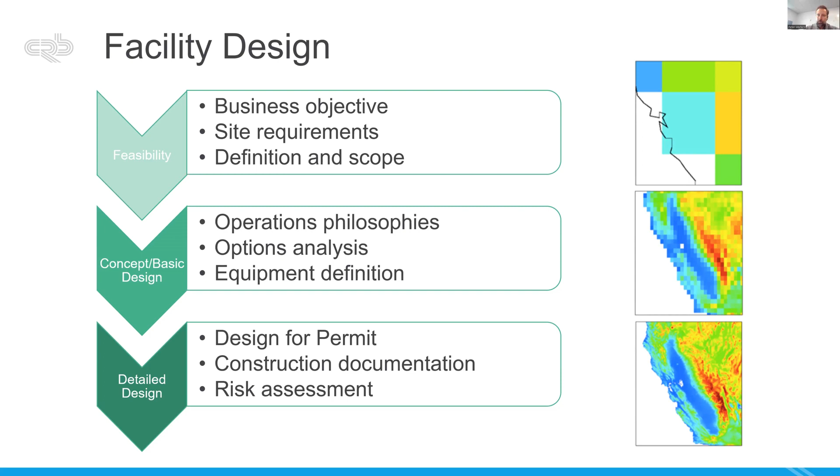Then you have the flip side of the process, which is construction. There's a lot of different ways you can go about construction, and I'll talk about that in a minute. But ultimately, you're taking those plans and you have a site and you are building the facility, or you're renovating a space, or you're retrofitting a core and shell. You're going through site walks as construction's going on to make sure that construction is happening per the plans. You want to make sure that you don't end up with the facility being built and then something was built wrong, or something was designed wrong and wasn't discovered until it was all fully built. You want to do field walks as much as possible to make sure that things are coming along.

Once the site is mechanically complete, as we call it, you still have to start it up. You still have to make sure that everything runs properly and as intended. So there's a phase where you are slowly turning on all the mechanical equipment, all the process equipment, all the utilities, and making sure they're getting into states that are operating as intended. You're doing engineering runs and engineering tests to make sure that things are to the quality levels that you want.

And then ultimately you're going into what we shorthand call CQV: commissioning, qualification, validation. That's the process of making sure that the equipment is doing what it's supposed to be doing, that it's the correct equipment per the design, and that ultimately your facility performs as it's intended to. And that'll be the basis for a lot of what we think of as a GMP space and a GMP facility, which is basically ensuring you have control over it and that you are performing it per your validated state.

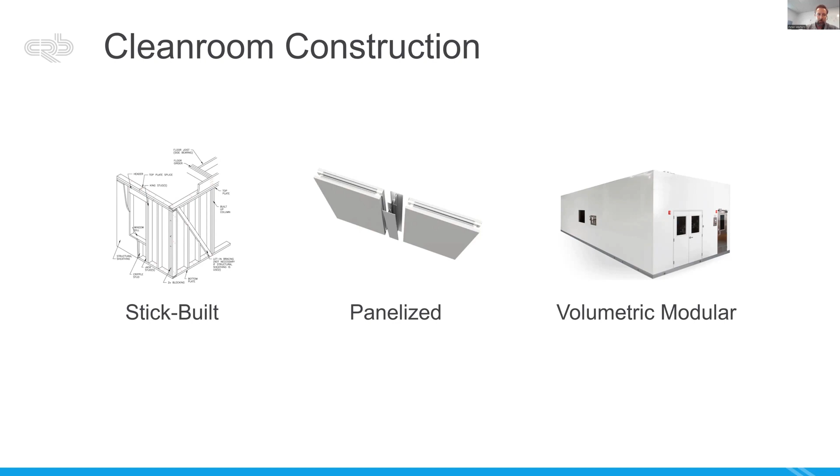So let's get into the actual clean room space and some design strategies here. I think the next couple sections are going to talk about space design strategy, and then even just like what is a clean room and how do we use them and what requirements there. I think certainly one of the things that's very tricky about cell therapy, GMP cell therapy specifically, is that there aren't any great standard models that you can use to design your space, because there's so many nuances to cell therapy in terms of what technologies you're using and what steps you're performing and how long those steps are. If you're shipping fresh or frozen, there's a lot of different considerations which resolve themselves into a whole smattering of

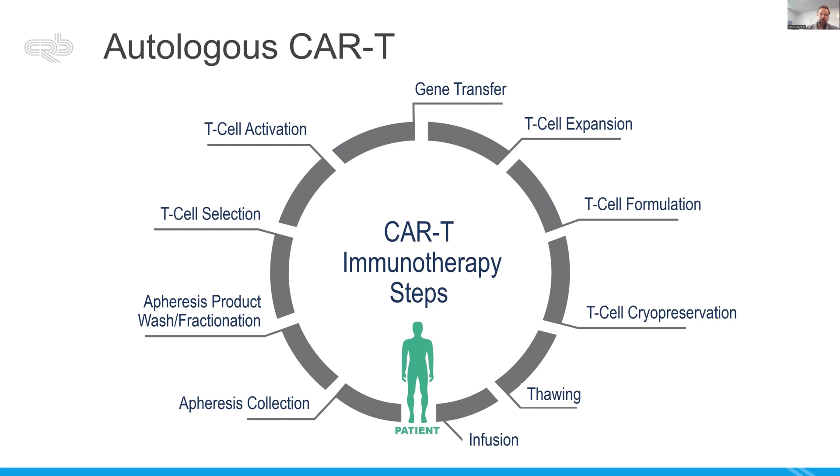So we're going to get into a couple different strategies here. There's a number of ways that you can go about it, but these are the three basic strategies that we talked about in the chapter. So in terms of room and space design, one strategy certainly is dedicated production space. This would be where you have a room where you are doing a process, whether the entire process or a portion of it, by itself. In this case, it would be patient dedicated, product dedicated.

This, of course, gives you maximum chance of managing cross-contamination or risk with any other steps that are going on, but they're also typically inefficient because everything in that room, including the square footage of it, gets tied up for that one patient. So these tend to be good for short duration processes. If you have a process where the whole thing can take place in a couple of days, this could be a great way to manage that process and de-risk it. It's good for open processes where you can right size the super highly classified environments. It's also good for processes with very high risk steps or very high risk materials.

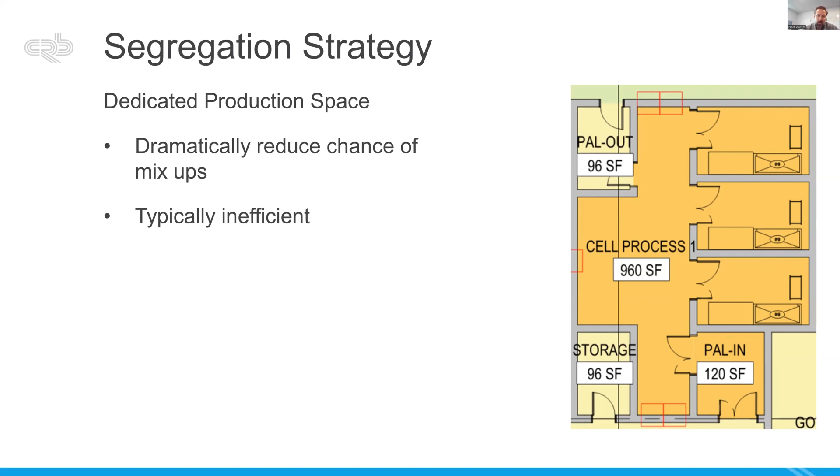On the flip side of that is the idea of what we call a ballroom. So a ballroom is going to be a much more open, flexible space where you're handling lots of different patients at the same time, maybe even different products, depending. It tends to be not only flexible because you can rearrange things in the room as necessary, but it can be a very efficient space usage because you're minimizing the number of airlocks and circulation corridors per patient.

Because you have all these patients in the same space, it works much better with closed processes. By a closed process, I mean a process that is fully contained within its equipment, where the process stream doesn't interact with the surrounding environment at all. And so, if you've got a closed system, then you're de-risking at the equipment level. And so that can enable you to use a ballroom setting, which again is going to be a lot higher efficiency, a lot more flexible in terms of accommodating different technologies in the future, or maybe even more patients per year in the future.

You can also use dedicated rooms, like I just showed in the previous slide, in conjunction with ballrooms, so that if you have one step that has to be performed open or one step that's very high risk, you can take your cells out of a ballroom setting into a dedicated space to do that one step or a small handful of steps, and then bring it back to the ballroom. And that's a way that you can manage the risk for high risk steps while also allowing for a much more efficient, flexible space.

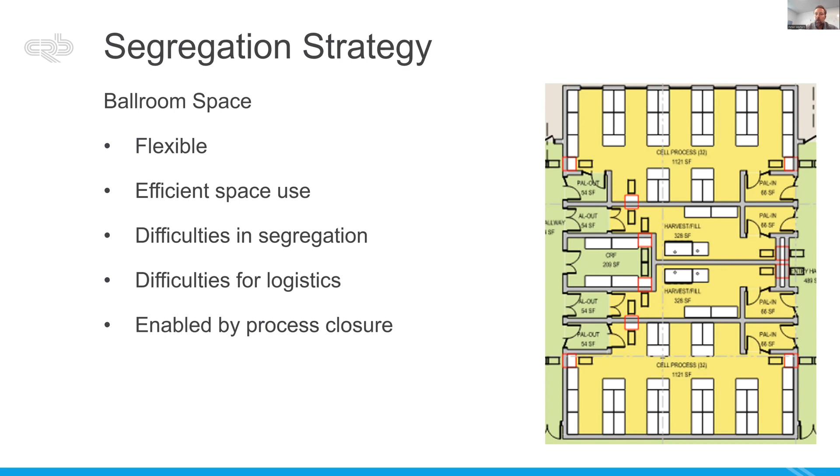We also introduce a strategy in the chapter that we sort of called a dance floor. And the idea here is using a combination of different rooms that are sort of right-sized to unit operations, as opposed to performing something in one space, maybe bringing it to another for certain things and then coming back and having workstation type approaches. The idea of a dance floor is to basically have spaces that are dedicated to certain unit operations, and you're moving your process across rooms through those unit operations.

I think what's powerful about this approach is that you can right size each of those rooms and number of equipment to accommodate utilization needs for that step. So if you spend a lot of time in an incubator, for example, you can have a space that's a little bit less classified with a lot of incubators. And if you're spending a lot less time in a separation system, for example, you could have fewer separation systems in the right classification to support that.

And so this allows you to really drive up utilization in your equipment, which ultimately is a much more efficient space design. However, in this type of strategy, you are moving your process through the building somewhat significantly. And so you're going to have maybe more movement logistics in the hands of operators to move those things around. You're going to want to make sure you've got practices and procedures in place to not only navigate the transitions between clean rooms, but also in terms of chain of custody and chain of identity, that you're not mixing up different cells as you move through that.

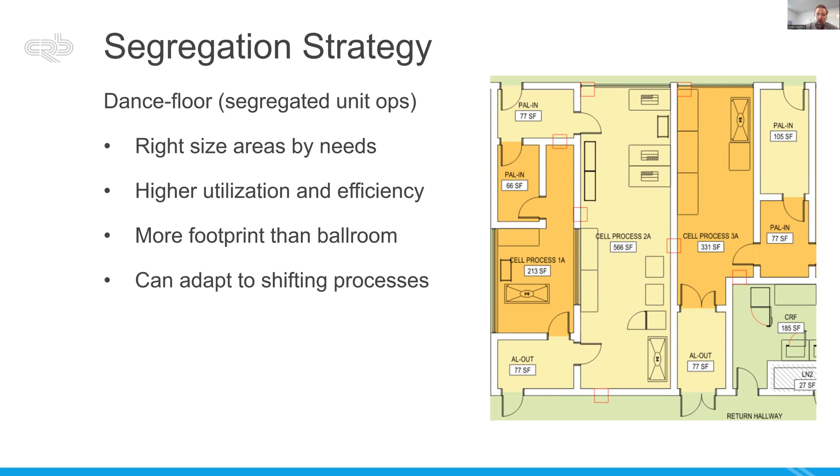Looking at these can help identify traffic patterns through your facility, making sure that you don't end up with bottlenecks at things like airlocks, but also make sure that if you have a lot of movement through certain corridor areas, you're aware of that and you can put things in place like temporal segregation, or maybe you make the corridor a little bit wider, or you've got staging spaces to help accommodate those movements. Because again, if you have a lot of motion, that introduces the opportunity for mix-ups or contaminations.

And I'm showing the GMP cleanroom cores here, but you should look at things like material and personnel movements across the whole life cycle of that process. So where it comes in at shipping, receiving, through the warehouse, through the facility corridors, into your clean rooms, and then back out, to make sure that, especially for autologous cell therapies, things are moving through your facility in a very facilitated way, so that you don't end up mixing up incoming and outgoing materials, for example.

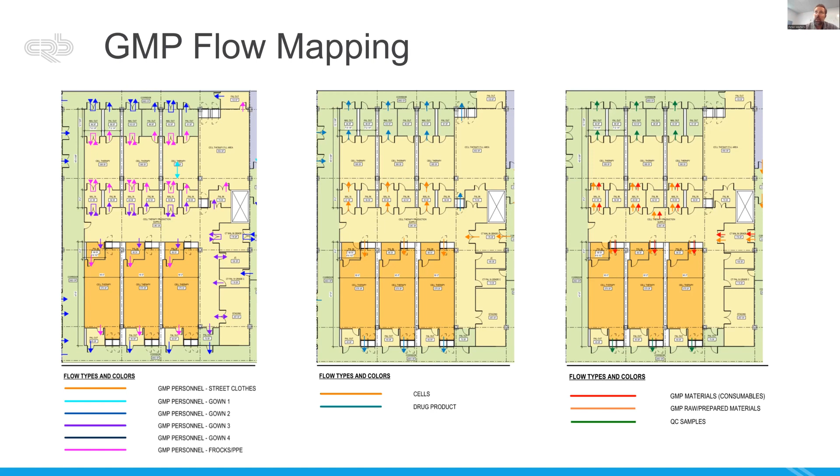When we're talking about clinical one spaces, I think the idea of using a glorified lab works pretty well, but I hate when people refer to GMP facilities as just a lab, because, again, the building and the space design want to facilitate all the movement. So I have a quick baseline case study here to show two examples of how, using the same square footage, you can dramatically change how the operators interact with the process in the space.

So in this example, you've got what is thought of as a unidirectional flow suite. We have a ballroom with various biosafety cabinets. You've got shared equipment, which could be in-process testing, cell counters. You've got maybe incubators or freezers or refrigerators put at the two ends. And so at a room level, you've got people coming in one side, going out the other. But within the room, you get this spaghetti diagram of back and forth movement between the workstations and the shared equipment, and people are overlapping, and it's definitely not unidirectional flow within the space.

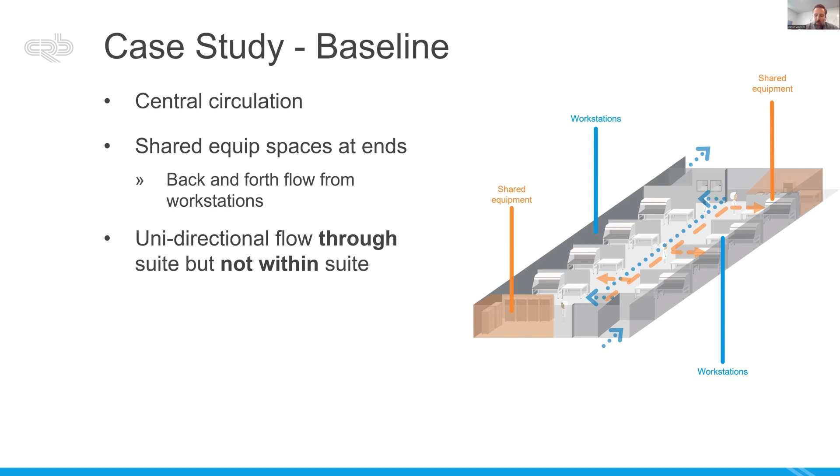Definitely some opportunities for people sort of across mixing up materials. Whereas if you take all that shared equipment and you lay it out longwise throughout the center, and you shrink the footprint top to bottom, so now actually the square footage is identical between this last model and this model. However, you can see not only do you have unidirectional flow through the room in terms of people coming in one side and leaving the other, but you've now separated that central aisle into two, and now you get people bouncing back and forth from their workstation to that center place and out.

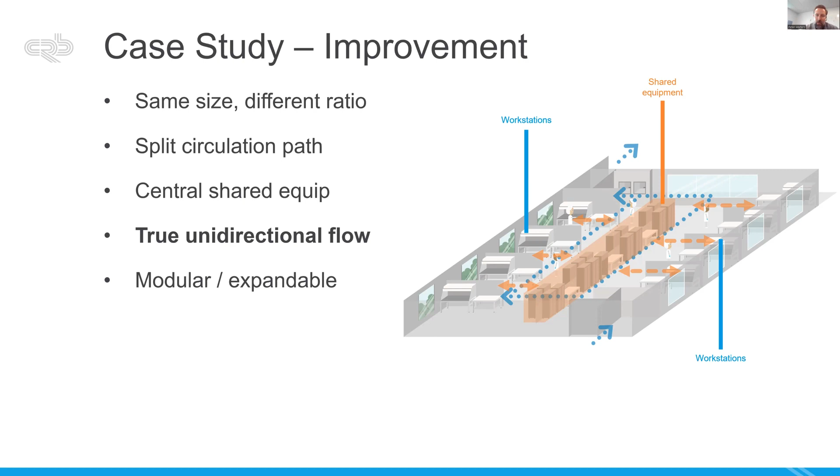So it's a much more facilitated unidirectional flow, much better segregation within the suite, much more identifiable workstations and process flow. It's kind of like an artistry to how you do these. Ultimately, you want to get to a general arrangement diagram that's very specific in terms of how you lay out your equipment and your room flow.

Certainly, you want to be mindful of how many people are going to be working in this space, what utilities are needed, and, especially when we talk about autologous cell therapy, trying to make these as efficient square footage wise as possible, because usually the idea around autologous cell therapy design is you design for X number of patients through this workstation approach, and then you scale these out.

And so any inefficiency in utilization of equipment, additional redundancies that maybe aren't needed, certainly any dead square footage in this space is going to duplicate every single time you repeat this out. And so getting it right the first time is definitely critical as early as you can.

At the same time, you want to be mindful of designing for a way to manage change, understanding that a lot of these processes, especially in early clinicals, aren't quite nailed down in terms of the technologies they're planning to use. And so being mindful of giving at least a little bit of space to accommodate different platforms that might come in, or different technology changes as you go through that maturity life cycle of clinical and realization into a commercial setting.

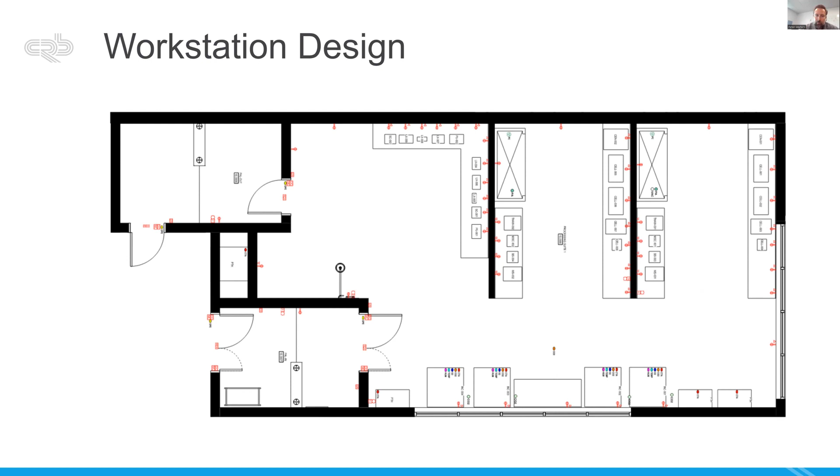And again, ultimately you want to have a facility design that is trying to prevent any chances of mix-ups and cross-contamination. There's a couple different design guides out there. We tried to capture a couple things in the chapter 11 itself, but as an example, NIH has a great guide for biosafety cabinet placement, some rules to help make sure that you're not getting crosstalk between various biosafety cabinets, that you're not putting things so close together that you're impinging on their processes.

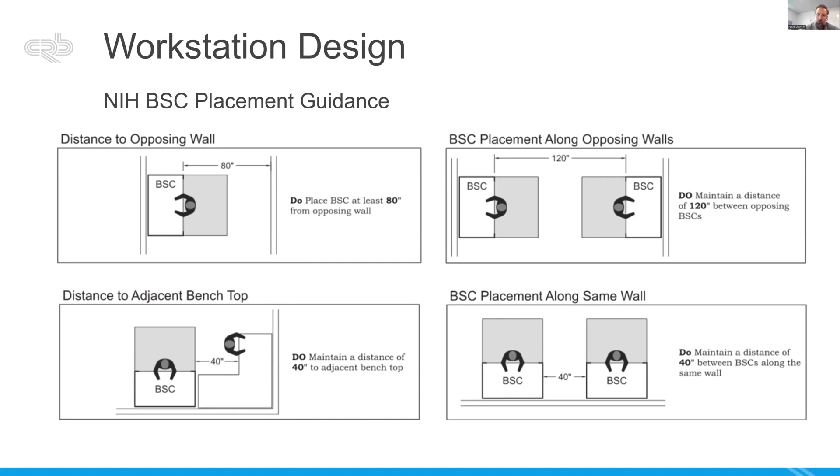And so we always try to incorporate these as we lay out the equipment, the support equipment, the testing equipment, but also the primary manufacturing equipment with any biosafety cabinets that they need to be interacting with. Another facility consideration, the EMA released the latest update of Annex 1, which certainly as far as the facility goes, has some implications for how you would design cell therapy facilities.

And there is a strong push now towards the ability to permit observation into production areas where you're doing aseptic operations. So really thinking about that glazing in the glass, not just for opening up daylighting and showcasing for the operators or showing off your processes, but also from a regulatory standpoint, they really want the ability to see into the space and get eyes on it without having to do full bunny suit gowning and getting into it, which is not really where you want observers or anyone from the agency to be anyway.

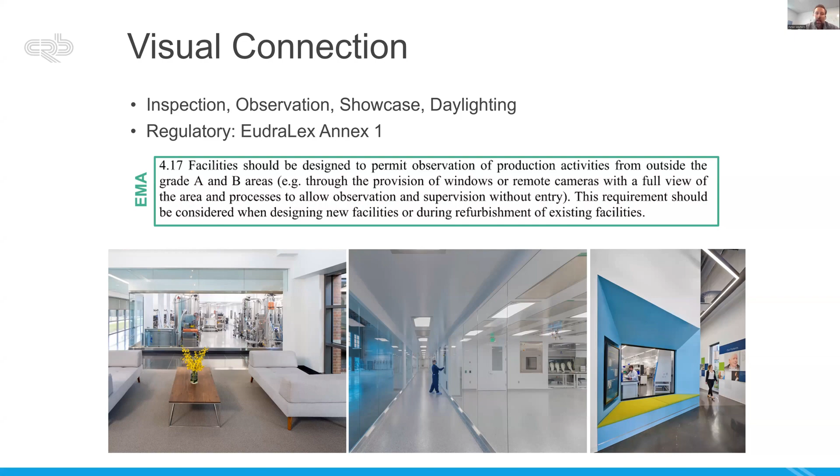And then the last thing about sites, when we talk about the facility on the whole, how you arrange all the spaces, especially for autologous cell therapy, is pretty critical. You want to make sure there's good handoffs between your shipping and receiving and how that gets to the warehouse, or how your apheresis gets to its inspection area, how that gets to the manufacturing, how the QC samples get handed off. And so how you arrange all the components of the whole space should be methodically thought through, really thinking about chain of custody and chain of identity throughout the course of it.

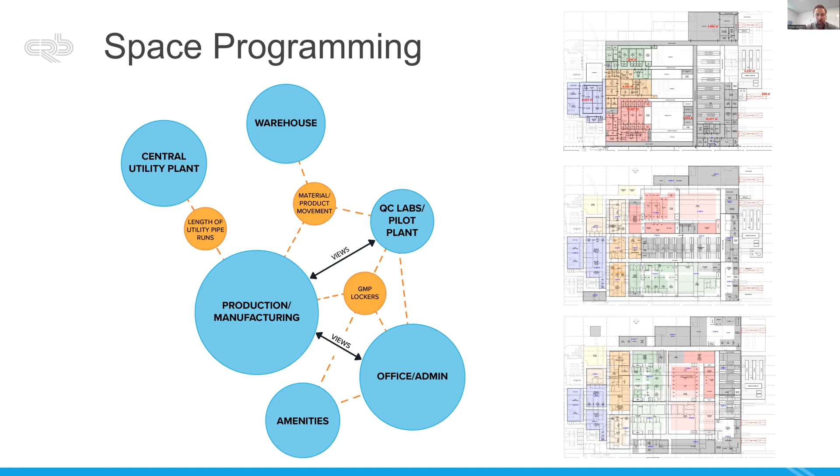We'll get into classified spaces. I'll try to move through some of these pretty quick. I know some of it gets kind of dry, but I think there's some things that are worth touching on. And again, you can always refer to the chapter if there's any questions that we don't have a chance to get to.

But originally for the US at least, Federal Standard 209E was used. When people say class 100 or class 1,000 or class 10,000, I think the only reason we mention it now is if you are using those terms for this standard, this was replaced over 20 years ago at this point. So it's definitely vestigial, and you want to be moving towards the much more modern standards.

The International Organization for Standardization released ISO 14644-1, which isn't specific to biotech, but is specific to clean room standardization. And you can see there's this categorization of 1 through 9, 1 being the highest degree of clean airflow, 9 being sort of the least clean of a classified space. The US FDA points directly to the use of this standard for how you define your clean room settings. And so we typically see ISO 5 through ISO 7, ISO 8 in reference with biotech facilities.

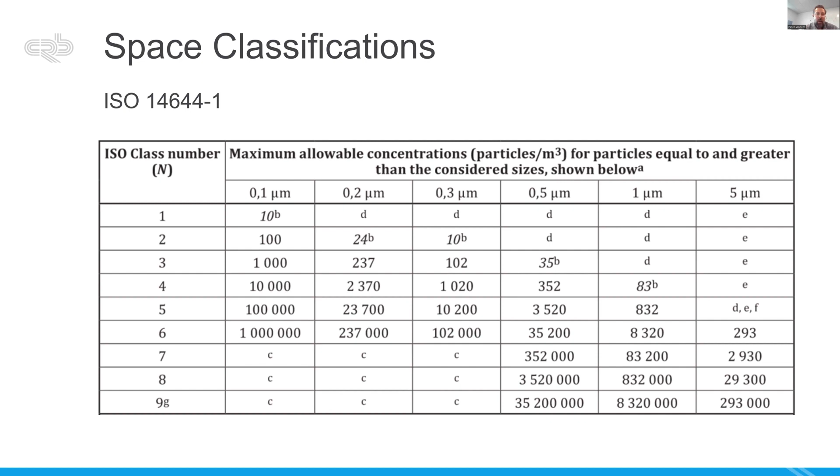Now, for the EMA, EudraLex points specifically to the use of the ISO standard as well, but incorporating the numbers from that standard into a more biotech-focused overlapping standard that they call the grade system. So grade A, B, C, D, A being the most stringent kind of clean air setting, D being the least stringent of a classified space. I've tried to show in the color bands here how they interact with each other.

I think one thing that is worth noting is that the ISO system doesn't account for whether there are people in the room or not, what is happening in the room. It is just purely a standard for air quality, whereas the grade system really tries to look at the degree of air quality while operations are going on versus at rest, which is when there's no operations going on. And you have to accommodate both those situations. And so you can see how there's a step change in that particle count between in operation and at rest.

But typically speaking, how we would translate between these would be from the in-operation standpoint. So grade A pretty much relates to ISO 5, which would be the airflow around critical operations where we have open cells that you're manipulating. Grade B or ISO 7 would be the background to that setting. So if you have a biosafety cabinet that's got a grade A environment, you'd have a grade B background to that. And then grade C or ISO 8 is sort of your general clean room core for any kind of at-risk activities. And then grade D is going to be much more de-risked.

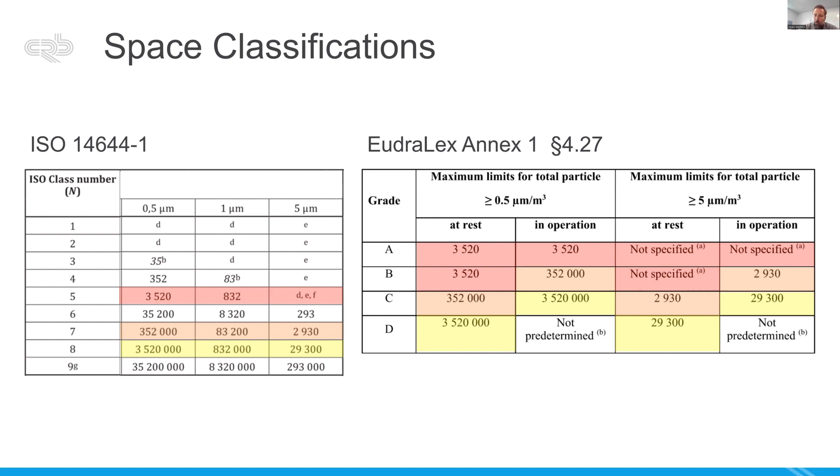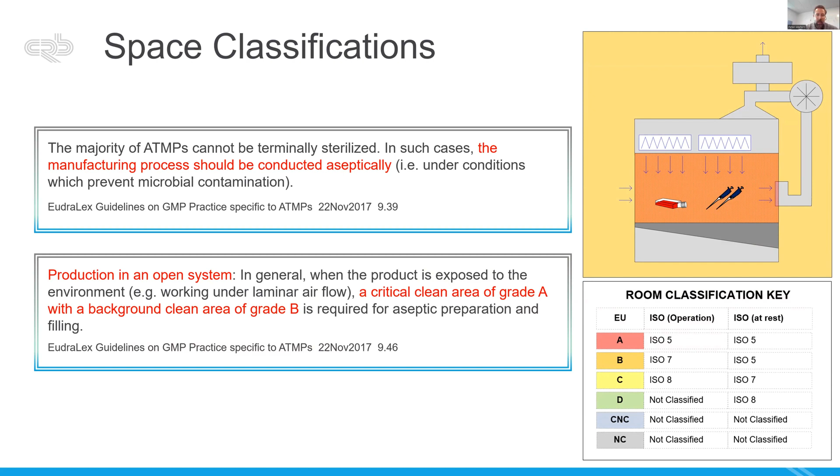Really quick to go through some case studies. So again, if you're doing an open manipulation of cells in a biosafety cabinet, that biosafety cabinet's going to need to be a grade A, and then the background to that is going to need to be a grade B. And that's pretty much aligned with the US. They point to an ISO 5, which is kind of the equivalent. I've got that room classification table there in the bottom right to help translate between the European grade system and just the ISO. So an ISO 5 biosafety cabinet with an ISO 7 background.

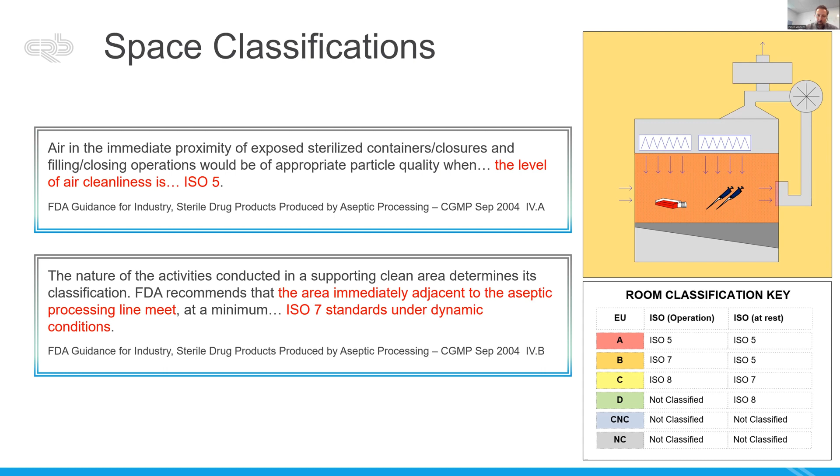Now we're talking about isolators. It gets a little bit trickier in general. So in Europe, I think there's now defined open and closed isolators, which changes the backgrounds you can be using. I think in general, Europeans are a little bit more open to the idea that if you have a fully closed isolator, you could go down to a grade D background. However, because there's no ISO equivalent for a grade D, the US and the FDA are still a little bit hesitant about how you manage that.

They still want to see that the aseptic operations are being performed in a clean room setting, and that typically comes down to an ISO 8 background. However, we have seen in some type C meetings the discussion that if you're fully adopting the grade setting, you can maybe get down to a grade D with US regulators. So it still is a little bit of a nebulous area, but I think that's trying to get navigated.

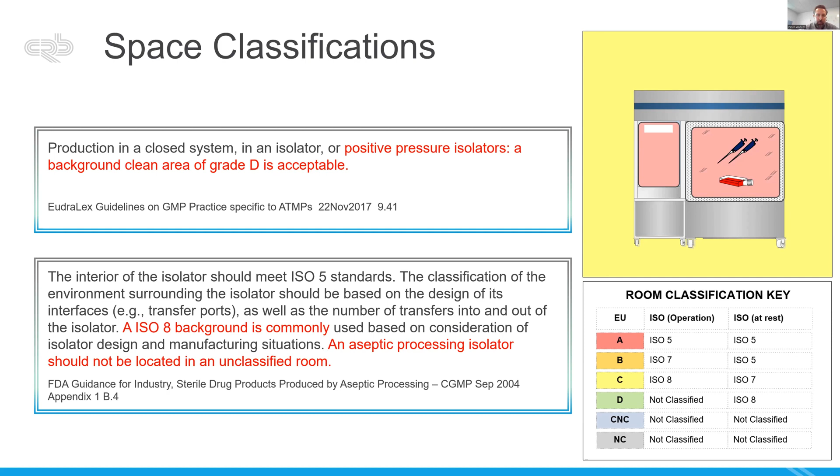And then again, with the Europeans, a difference between an open isolator, which would be an isolator with a mouse hole or a transition area, versus a closed isolator where everything is fully contained. I think if it's fully contained, you can get down to a grade D background. If there are openings in it, they still want to see a grade C background, which makes sense from a risk standpoint.

And then for any sort of closed systems, I think you need to be assessing how robust the materials are in terms of if you want to push to a grade C or a grade D. I think certainly in the US, again, they're going to want to see all that in an ISO 8 background. So we tend to just design around a grade C.

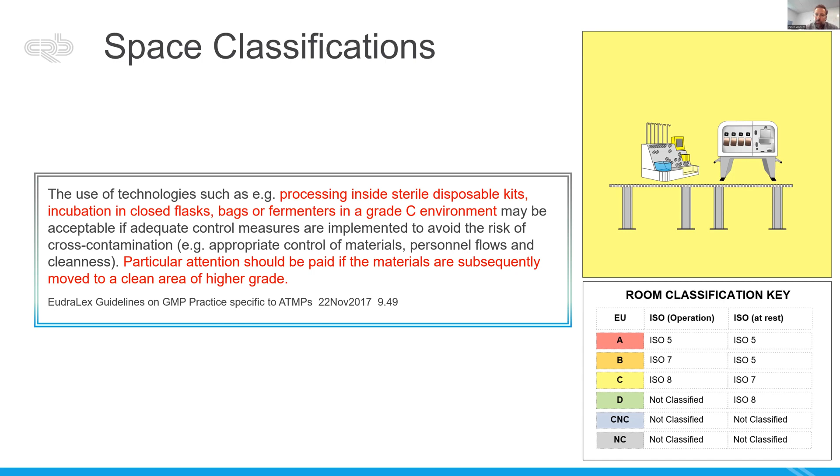I'm hesitant to bring this up, but there are some exceptional circumstances for which in very early clinical, if the process, by the means and definitions of the process, cannot be done in a fully GMP environment, there are some considerations you can do. Certainly you still have to perform it in something like a biosafety cabinet, but you could have lower classified backgrounds. Again, if something had to be performed immediately next to the patient, or some sort of circumstances.

I think we talk about autologous manufacturing for the most part. I have never come across this to date, so I'd be very hesitant to point to this as an exceptional case that you could do. But in general, the idea is being mindful of your process and the steps involved in it, and then trying to accommodate the regulatory system as much as possible.

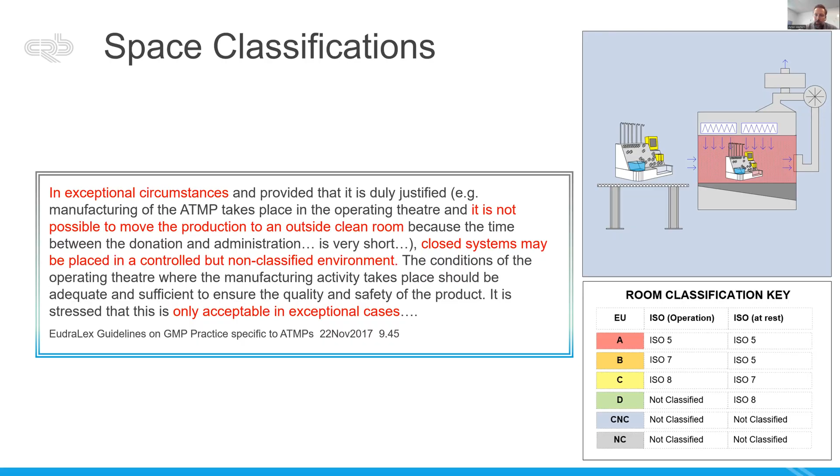A real quick look, I know we're getting close on time here, at some final considerations around facility use and planning. So we talk about clean rooms. Humans are the #1 particle generator by far. And so as you go into higher classified areas, not only are they more expensive to build and maintain, but you have to be doing higher degrees of gowning. And all that gowning is there really to protect the clean room from the people, to contain as much of that as possible.

You also have to qualify and monitor these environments. So having a site plan that walks through where you're sampling, how you're sampling and how often you're sampling, to ensure that your clean room backgrounds are being maintained at the levels that you're claiming. Higher classified areas are going to require more frequent samples. So an ISO 7 or a grade B space, you're going to want to sample more often than an ISO 8 or a grade D space, because it's a more critical area.

And then certainly what we call the critical zone. If you're doing any open manipulations in an ISO 5 or grade A space, you're going to have to be monitoring continuously throughout the entire course of that to make sure it was a qualified environment for the entirety of that manufacturing step. And if you want to comply with EudraLex and the grade system, you have to do some form of sampling for both in operation and active usage, but also passive sampling for at-rest considerations.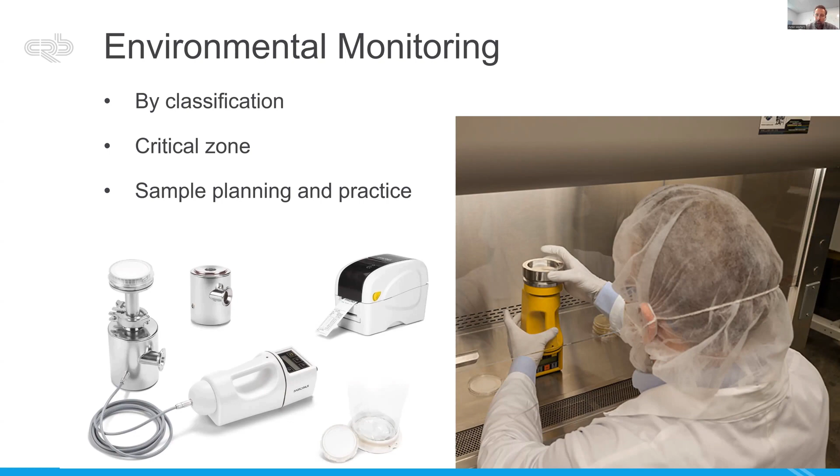And again, all of what we just talked about comes back to that QRM principle of quality risk management, making sure that your processes, your procedures, your equipment, your facility are all designed and put in place to manage the underlying risk for your process, and that you're doing your best to bring forth the highest quality products for patients that you can.